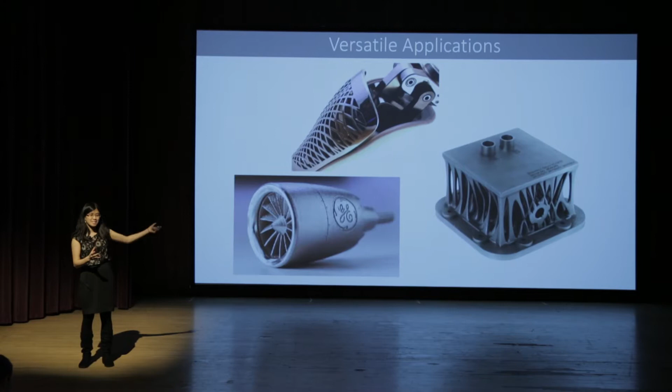However, all of this comes with challenges. In industry, there are very high standards for what materials they're allowed to use, especially in matters that concern safety. Because 3D printing is so new, the quality control is not up to par. So it's very difficult to get a consistent material, and it's very hard to reproduce a good build.

Also, 3D printing is very direction dependent. So if you build a part from left to right versus bottom to top, you can get drastically different properties.

And why is that? To understand it, you have to go back to material science. One of the core ideas of material science is that this is a matter of cause and effect. The cause is the build process, or how you make the material. And the result is your material properties, such as strength, ductility, how it fractures, and so on.

The link between them is the microstructure. Now, microstructure is just structure on a micro scale that makes up a material. So think of a bridge, right? The strength of a bridge is determined by the type of beams you have, the locations of the beams, and the orientations of the beams.

It's the same thing for materials. When you have microstructure, it determines the material strength based on the type of microstructure, the location of the microstructure, and the orientation of the microstructure.

And because it's a microstructure, you need specialized tools to see them. You can use a microscope, or if you're more high-tech, you can use X-rays. Because metals are so high density, you would want to use very high energy X-rays to see through the metal. Only way you can get high energy X-rays is through a particle accelerator.

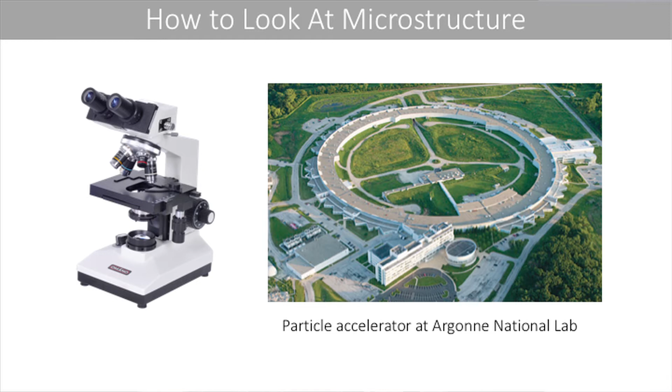And luckily, we have a particle accelerator right outside of Chicago at Argonne National Labs. We do a lot of our experiments there. And with this technique, we can see 2D and 3D and even video images of microstructure.

Here are some examples of microstructure. For one, you can see porosity, which are just defects or holes in your material. On one hand, if you have too many holes, your material is pretty weak. But you kind of want some holes because that will make your material lighter.

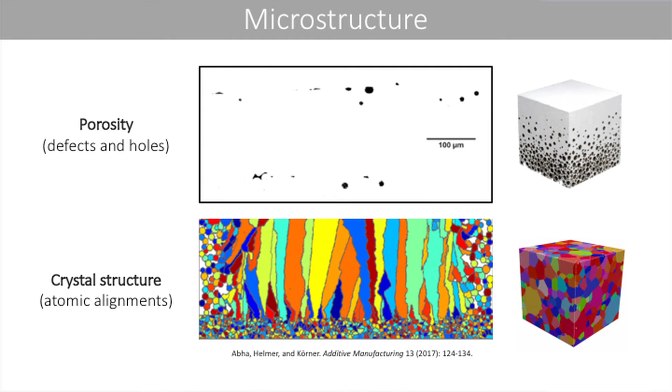On the other hand, you have crystal structures, which are the way that the atoms in your material are aligned. And this determines in which way your material is strong or weak. During the build process, the temperature and heat flow direction will influence your microstructure.

If your laser is too weak, for example, you can get insufficient fusion between the layers and leave gaps, like what you see here on the screen. But if your laser is too strong, it can cause evaporation, and that will cause gas bubbles to form in your material. It's similar for crystal structures, but also more complicated because crystal structures can be any shape, size, or orientation.

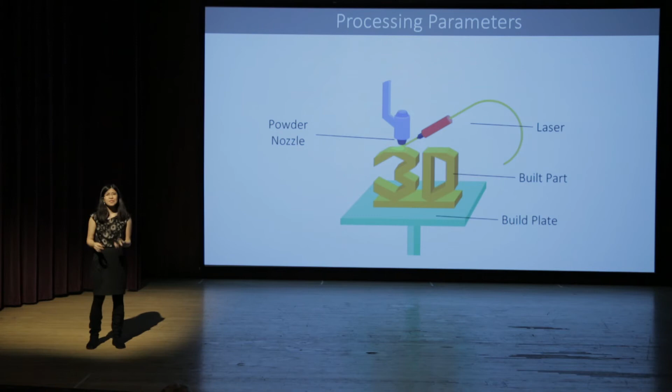So now that we have the results, which is the microstructure, what about the cause? During the build process, in the process that we use, we have a powder nozzle and a laser. And at each point in the build, a computer is controlling various parameters related to these two things.

Some of the things the computer is controlling are the powder material, the powder flow rate, the temperature of the laser, the width of the laser beam, and the tool path of the laser. And while all of this is happening, the substrate or material is giving off heat the whole time. So this makes things very complicated.

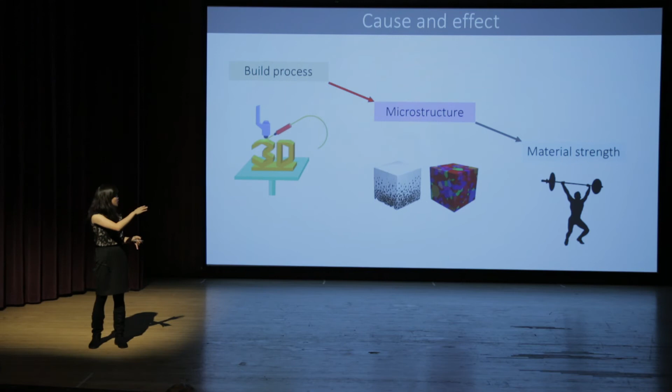If we're to understand this chain of cause and effect, we need to isolate the effects of the parameters and their result on the microstructure. But if there's so many parameters and so many different ways a microstructure could turn out, how do we figure out that relationship or quantify that relationship?

Sure, you can do thousands of experiments, but that'll take a lot of time and a lot of money. Instead, because I work in computational mechanics like Shiva, we use simulations.

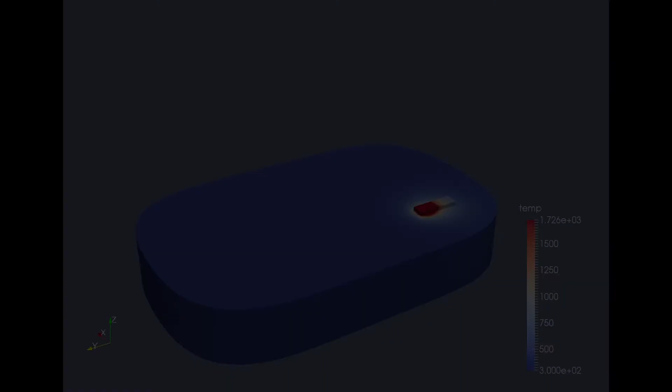In the simulation you see here, the red spot represents the heat of the laser, and it's building the material line by line, layer by layer, just like in a real build.

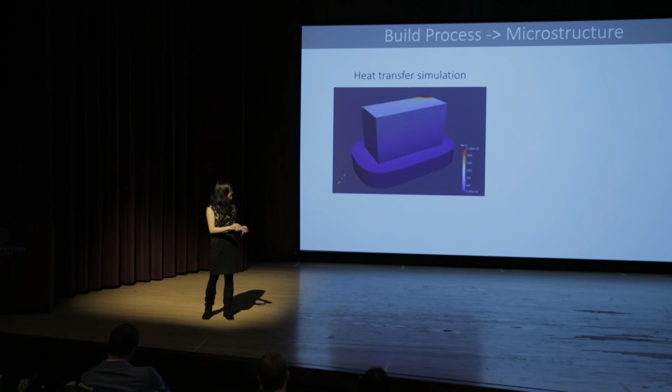After this, we can extract the temperature information and heat flow direction at every point in the build. In parallel, we can build the same exact part in real life and do experiments at Argonne on the microstructure. So we have microstructure at each point of the build in real life.

Then we can compare point by point and find the relationship between the temperature and the heat flow and their effect on the microstructure.

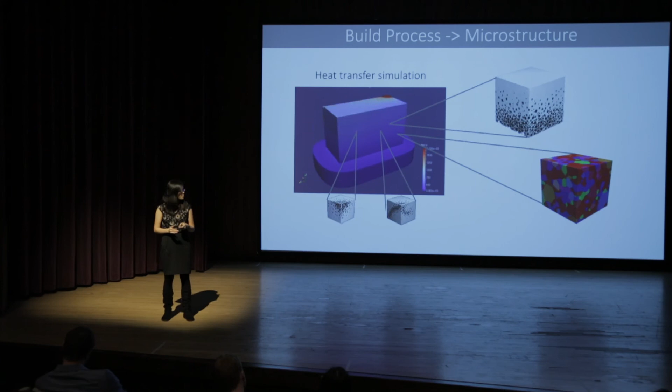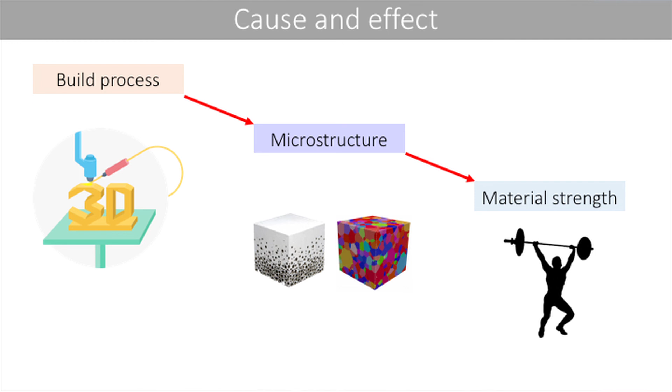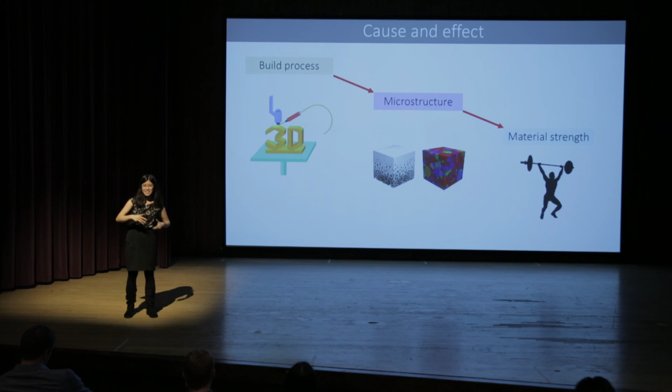The goal of this is to build this relationship between every link in this process. If we can build a good relationship between the process, structure, and property, we can go in the reverse direction. You can choose a material strength or property that you desire, backtrack and design the microstructure to help you achieve the goal, and then control the process parameters to get that microstructure.

With this, we can get improved quality control in 3D printing and help it achieve its full potential.